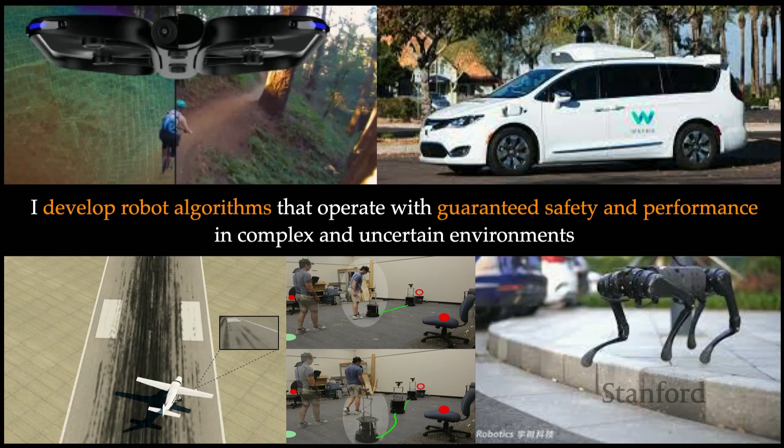If you look at these systems, machine learning and AI are becoming increasingly pervasive in their autonomy stacks, most notably for perception and trajectory forecasting, but also for planning and control. For good reasons: machine learning is really good at capturing the complexity of real-world situations that these systems must operate in, which could be otherwise very hard to capture using engineering domain knowledge.

But inclusion of machine learning has also come up with some new safety challenges for these systems. We are right in the Bay Area where we hear news such as Cruise cars being rolled back from San Francisco City, or robots crashing into humans on the factory floors. The issue is severe enough that the US government, and since then many other governments, have passed executive orders to prioritize discussion on AI safety, both for autonomy and AI more broadly.

So there is this tension that we have a lot in autonomy today, which is: how can we enable these systems to leverage the capabilities and excitement offered by modern machine learning methods while also maintaining safety? In my talk today, I want to think a little bit about the source of this tension and what can we do about it.

I think one of the main reasons for this tension is that if we look at machine learning systems today, most of them are designed without any specific regard to safety. And when safety issues emerge in the design system, post hoc solutions are often engineered to counter these risks. I'm going to refer to them as safety bandages throughout my talk.

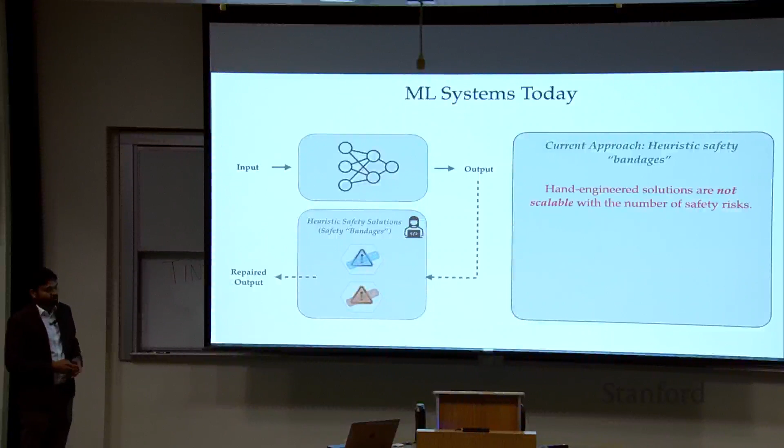First and foremost, these hand-engineered solutions are simply not scalable with the number of safety risks and the situations this system must encounter. Moreover, these post hoc solutions often tend to be conservative in nature, which might degrade the performance advantages that we get out of machine learning methods. And finally, the heuristics designed for certain kinds of deployment conditions might not work as the systems encounter new and new deployment conditions in the real world.

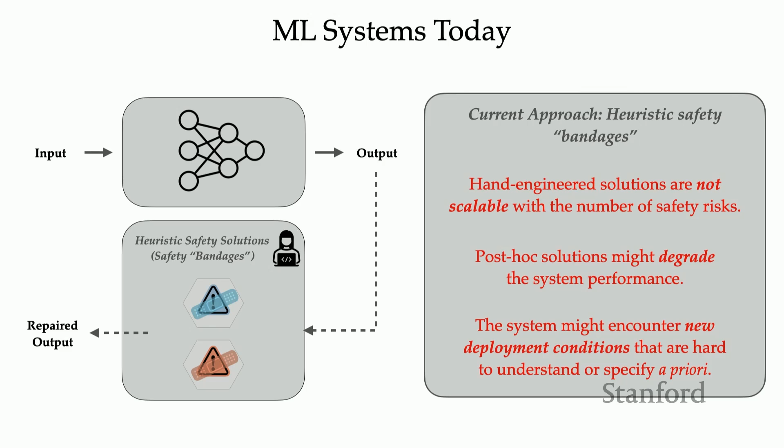So to overcome these challenges, in our research, we think of safety of learning-based systems as a continuous process, where safety is formally ingrained in different stages of the learning process, starting from the design and training phase, to their deployment, to iteratively improving the safety over the system's lifecycle.

So what that means is that we develop algorithms that programmatically incorporate safety requirements in the training process itself, in order to learn inherently safe and robust controllers and policies for robotic systems. Now that I would call design-time safety methods, or design for safety.

Now that's definitely a step forward, but that's not all, because as these systems will operate in new conditions, they will need to adapt their behavior. So we are developing methods that detect out-of-distribution and anomalous situations for these systems, and correspondingly adapt their behavior in order to maintain safety.

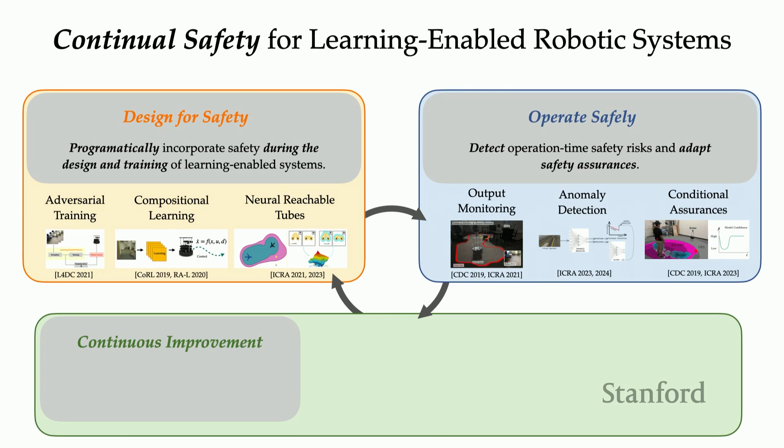And finally, we want these systems to learn from their past failures, past mistakes. We don't want the system to make the same mistakes again and again. So to close this loop, we are developing methods that allow robotic systems to improve their safety from their past failures. Together, I think of this as a closed loop — I call it a continual safety assurance framework, where assurances are provided provisionally during the design time, they are monitored and adapted during the operation time, and they're continuously improved over the system's lifecycle.

In the remaining time that I have, I want to dive a little bit deeper into some of my work. So we will start with talking about how can we learn provably safe controllers from data, how can we adapt these controllers online under new deployment conditions, and finally, I will talk about how can we stress test a given policy or controller to mine its safety critical failures.

So let's talk about learning safe controllers. But even before we talk about that, let's take a step back and ask ourselves, what do we even mean by safety? What do we want out of this safety analysis in an ideal world? I thought about it a lot, and I tried to summarize my thoughts in a single sentence, and this is my attempt at that.

I would say, out of safety analysis, we want to determine whether and how a robot can prevent its trajectory from entering into some undesirable set of states, which I will also refer to as the failure set. So what that means is that we want two key things. First, we want to quantify which configurations of the robot are doomed to fail versus which configurations are safe to be in, and how can we keep the robot in these safe configurations. So first is the problem of whether the system is safe, and the second is how can I keep the system safe. So I like to call it the whether and how of safety, and I will refer to that throughout my talk.

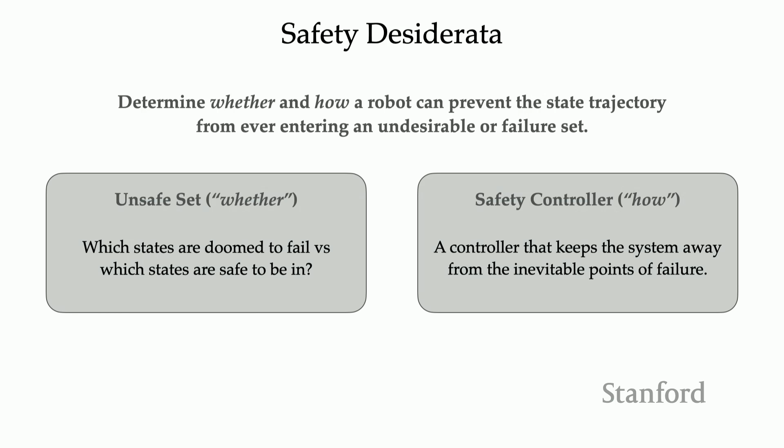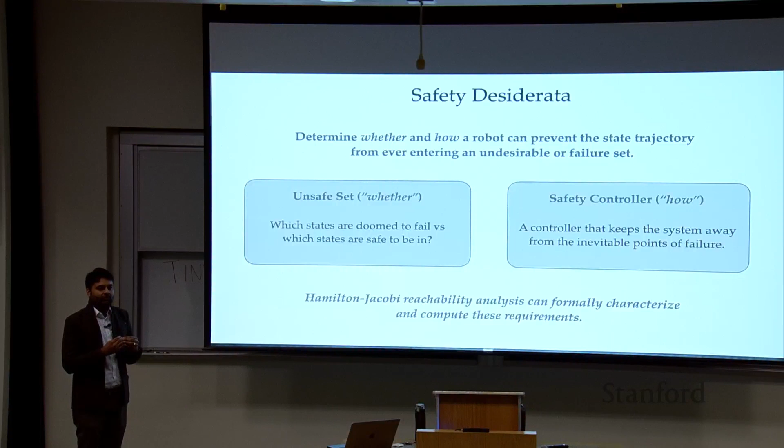Now, the good news is that control theory provides us a number of powerful frameworks for doing safety analysis of autonomous systems. In our work, we use one such framework quite frequently, called Hamilton-Jacobi reachability analysis. The reason for that is that not only does it help us mathematically characterize these two requirements, but also provide a mechanism to automatically compute them. So let me spend the next few minutes talking about what Hamilton-Jacobi reachability analysis is, and then I'm going to come back to the question of learning safe controllers from data using reachability analysis.

In reachability analysis, we assume that the underlying robotic system has some dynamics F with state X, control U, and disturbance D. So disturbance here represents uncertainty in the system, for example, modeling error or unmodeled effects, or an actual adversarial agent that we may want to safeguard against.

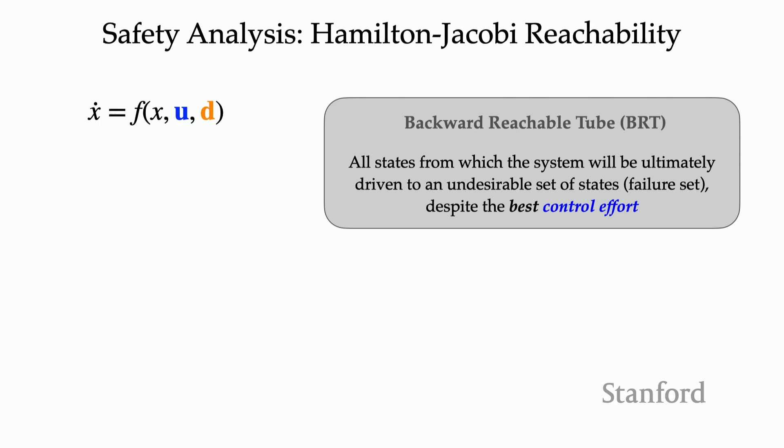Now, given these dynamics, the key thing that we are interested in is the backward reachable tube of the system, which is a set of all initial states from which the robot will be ultimately driven to an undesirable set of states, or a failure set, despite the best control effort. So essentially, the backward reachable tube represents the unsafe configurations for the robot and should be avoided.

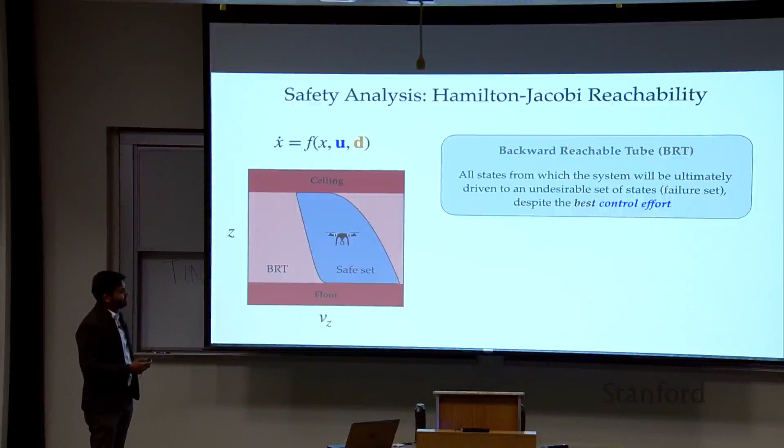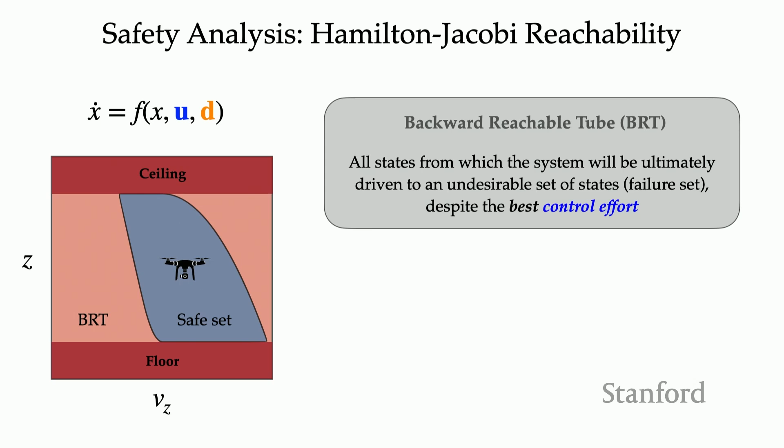Let's try to understand that with the help of a very simple example. Imagine a quad rotor moving longitudinally up and down in this room. Here the ceiling and the floor might represent the failure set that we don't want the quad rotor to crash into. The light red region over here is the backward reachable tube, meaning that if the quad rotor starts inside this set, then no matter what it does, it will eventually crash into the ceiling or the floor. So there is nothing you can do to avoid the collision.

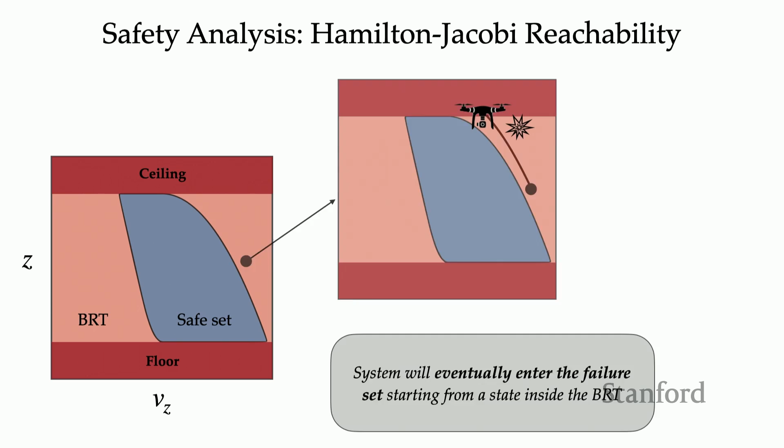In other words, these states are as doomed as being in the ceiling or the floor. The contrast of this light red region is the blue region, or the safe set for the system, meaning that if the quad rotor starts inside this set, then it has a controller or a policy to keep it inside this set at all times. So reachability analysis will give us both this blue set as well as this safety controller.

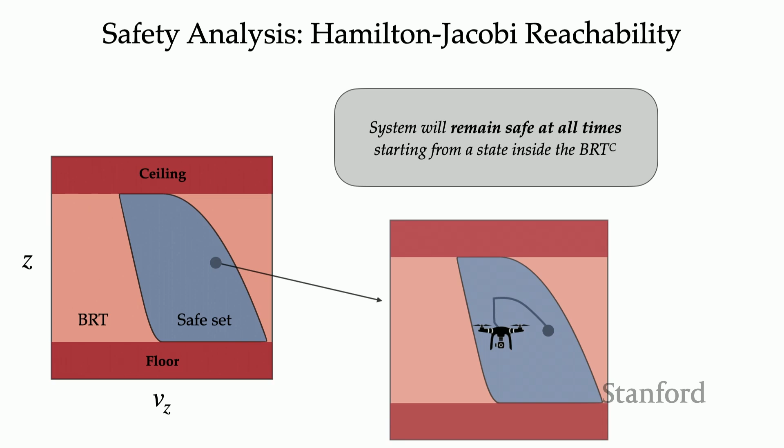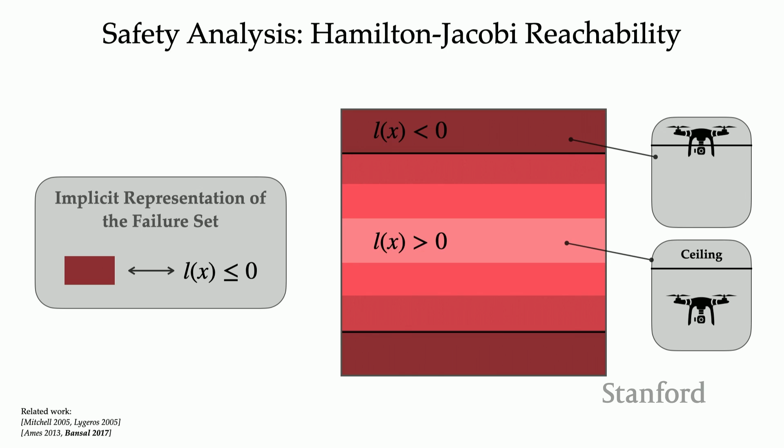So I'm going to dive a little bit into the math of reachability analysis and how it computes these two entities. The first step to do so is to define our failure set implicitly with a function L of x, which is negative inside the failure set and positive outside. So you can think of L of x as the safety reward the robot gets at state x. If you're inside the failure set, you get a negative reward, and if you're outside, you get a positive reward. We can use any reward function that satisfies this property, but the one that's quite popular in robotics is the signed distance function to the failure set, which is naturally negative inside the set and positive outside.

Given this reward function, the cumulative reward of the trajectory is given by the minimum safety reward along the trajectory. This is slightly different from normal optimal control and reinforcement learning problems where it's a sum of rewards. Instead, it's the minimum of reward. What that means is that if the robot trajectory ever entered the failure set, this cumulative reward will be negative, otherwise it will be positive. So just looking at the sign of this reward, I can tell whether the system trajectory was ever unsafe or not.

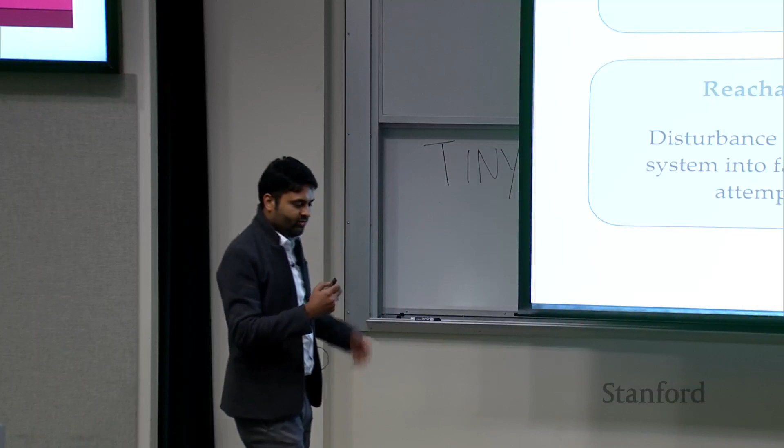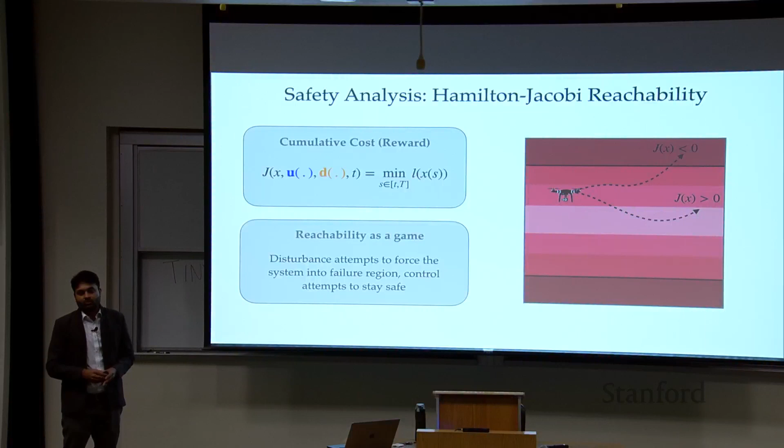And then, of course, we have control at our disposal. So what we want to do is formulate this game between the control and disturbance, where the disturbance attempts to force the system inside the failure set. In other words, it tries to minimize our safety reward, whereas the control tries to stay out of the failure set, maximizing the safety reward.

Similar to any other optimal control or reinforcement learning problem, we have a value corresponding to this game, which is simply the control maximizing and the disturbance minimizing this overall cumulative reward. Intuitively, this value function captures the closest the system will ever get to the failure set. If the value function is negative, the system must have entered the failure set at some point. If positive, the system remained outside the failure set at all times. So the backward reachable tube, or the unsafe set, is nothing but the set of states where the value function is less than or equal to 0.

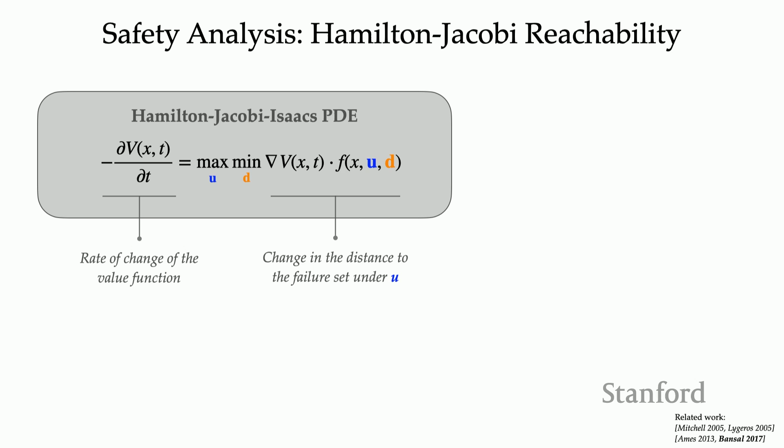That's the idea of reachability analysis. Now, this value function can be computed using the principle of dynamic programming, which results in a Bellman iteration or Bellman backup. But in continuous state and time, this results in a partial differential equation. So this is just the Bellman equation written in continuous state and time, honestly. But just like the Bellman equation, essentially it relates how taking a particular action affects the system value, or how the system's distance to the failure set changes. Once we solve this partial differential equation, which is called the Hamilton-Jacobi-Isaacs partial differential equation...

...we get the value function. Here I'm showing that value function for the quadrotor example I was showing earlier. More red means the value function is more negative, and more blue means it's more positive. So these states, which are closer to the ceiling and floor, are particularly bad, whereas states toward the middle of the room are very safe, as we'd expect, since we're equidistant from the ceiling and floor.

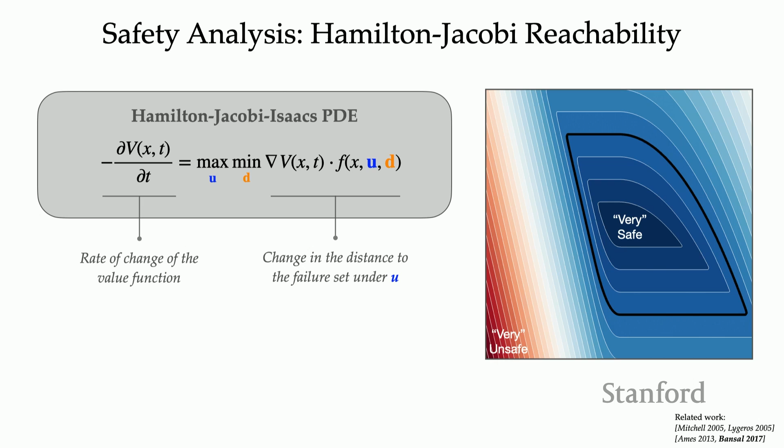Now, quick question: the value function is more negative toward the lower end than toward the upper end, even though the failure set is both ceiling and floor. Could you guess why?

Gravity. Because gravity is pushing us more in one direction. So when we are closer to the floor, we are more unsafe than when we are closer to the ceiling, which is what this value function is capturing in this color bar. But the beauty of reachability analysis is that, while this is an intuitive example, that's not all it's meant for—it automatically captures the effect of the system's dynamics on its overall safety.

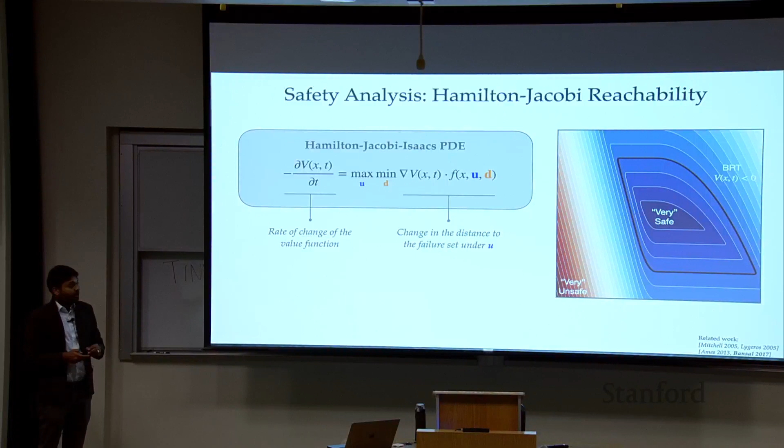Now, along with this value function, it also provides us a safety controller. Intuitively, what it does is that at any state x, it pushes the system toward higher and higher values—remember, positive values mean more safe. So it's essentially pushing us in the gradient ascent direction of the value function. That's what it's doing, okay?

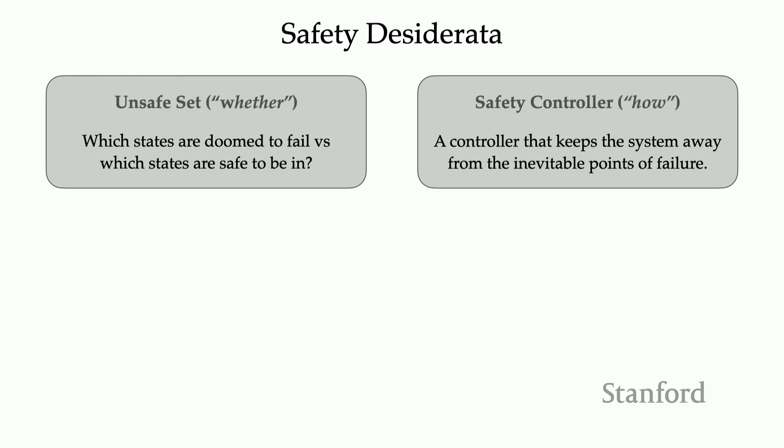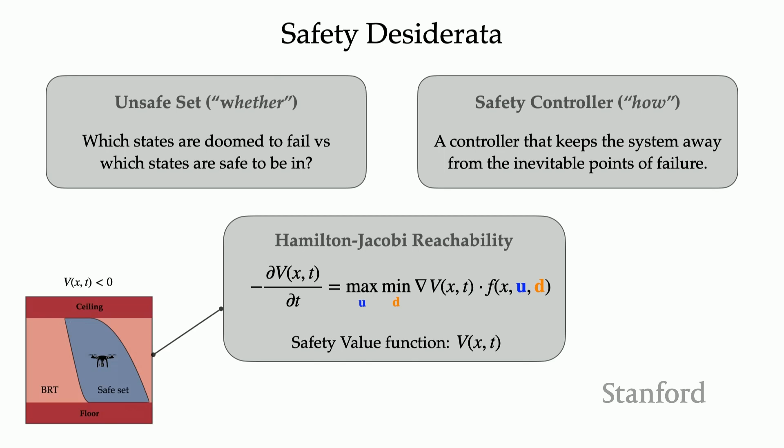So taking a step back, if you recall, I said there are two key things we want out of safety analysis: a set of safe states and a controller to keep me inside the safe states. I was talking about Hamilton-Jacobi reachability analysis, which captures these requirements with the help of the safety value function V, whose sign tells me whether I'm safe or unsafe, and whose gradient tells me a safe controller for the system.

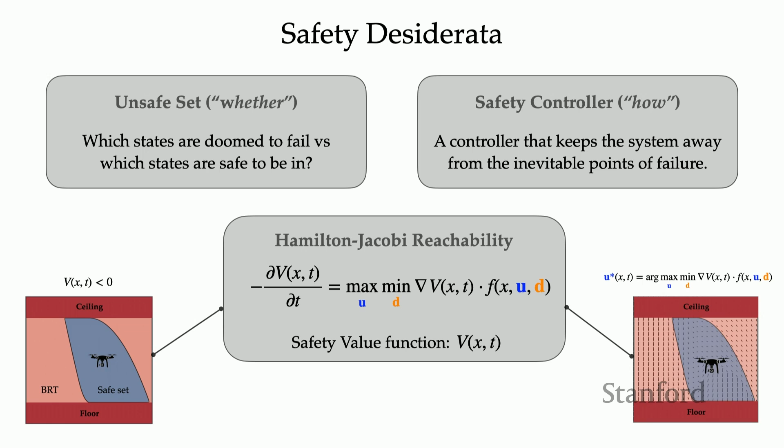Once again, the nice thing about this theory is that it can be applied to general nonlinear autonomous systems. But there are also a few challenges. The biggest one is scalability. Even though the theory is quite general, computationally it is very hard to scale these methods beyond even 5-dimensional systems, which really limits their use case in modern robotic systems. The second, equally bothersome challenge is that it's not immediately clear how to interface these methods with real-world data and machine learning models.

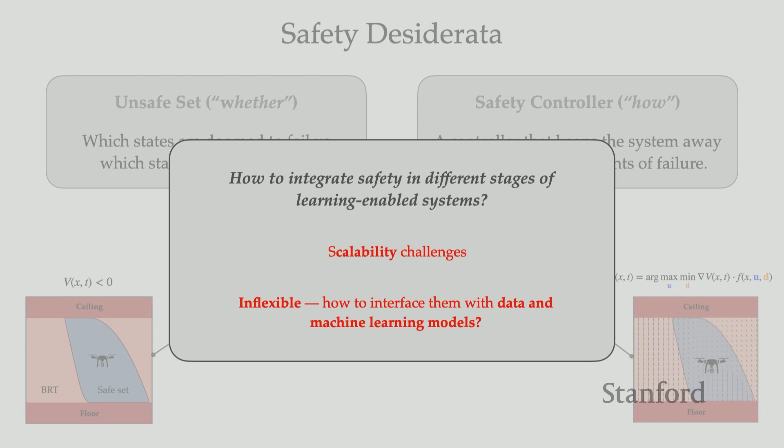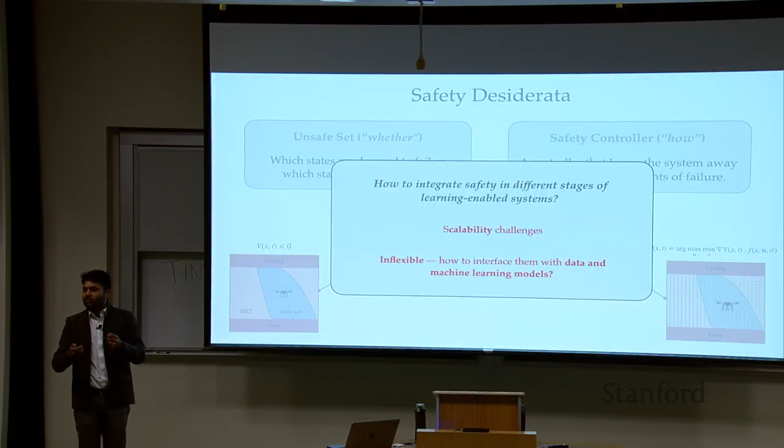So to begin making progress on these challenges, we will lean into neural approximations of the safety value function. Now, of course, we are talking about safety-critical systems, so we have to be a little careful when using neural networks, and I share that concern as well, and we will talk about it. But for now, I want to put guarantees on hold for a minute and talk about how we can structure the learning problem in order to learn good representations of safety value functions, and then I will come back and talk about assurances under these representations.

More specifically, we will learn a neural approximation of the safety value function, which takes as input the state and time of the system and outputs the corresponding safety value function. Once trained, this value function can be used to synthesize the unsafe set as well as the safety controller using the same mechanism that I just described. But how do we obtain this value function?

So we call this method DeepReach. DeepReach is a self-supervised learning method, which relies on the fact that the true safety value function must satisfy the partial differential equation that I showed earlier. So the PDE error can be used as a signal to train the safety value function. In each training iteration, we randomly sample some state and time, propagate it through the neural network to compute the value function, and correspondingly compute the PDE violation error. We backprop from that to optimize the neural network parameters. So over time, the neural network is incentivized to learn a more and more accurate representation of the safety value function that is consistent with this partial differential equation. It's very much inspired by physics-informed machine learning these days.

There are two key advantages of doing this. Number one, we can explicitly bake in safety requirements in the training process itself and learn inherently safe controllers from data. Second, the neural representations are much more easily scalable to higher dimensional systems, so we can synthesize safe controllers for a broader class of autonomous systems.

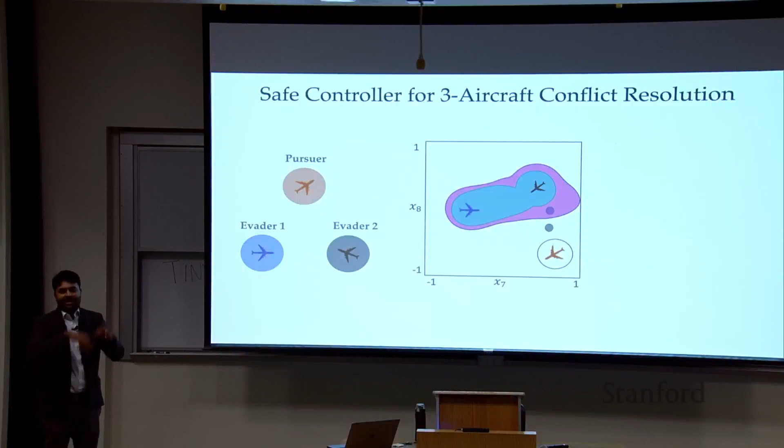Given the high dimensionality of this problem, a direct BRT or unsafe set computation is not scalable in this case. So what is often done in multi-agent literature is to compute pairwise collision sets between these aircraft and take their union as an approximation of the unsafe set. I'm going to show you a slice of that 9-dimensional set in 2D, shown in green. This means that if I start at any configuration inside this set, at least 2 of the 3 aircraft will come into close proximity of each other, in other words, they will collide.

But with DeepReach, we can directly compute the high-dimensional BRT, and a slice of that is shown in pink. It captures the green region, but has some additional configurations that we could not capture earlier because of computational limitations.

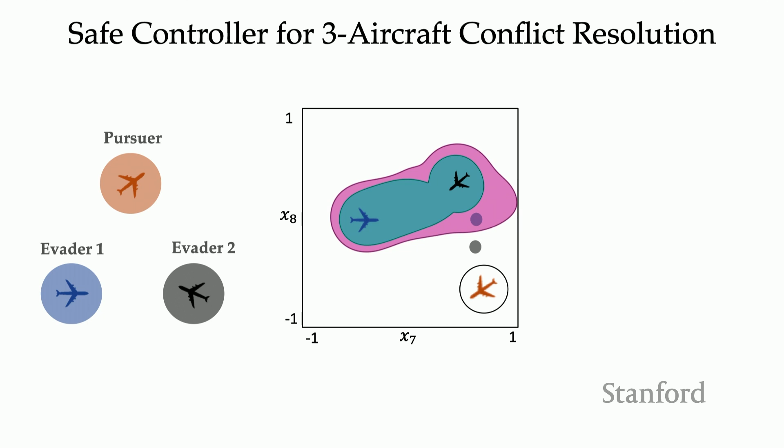Let me show you one such configuration and see what's going on here. Starting from this configuration, I'm plotting the trajectories of the 3 aircraft. Here you see the orange vehicle going after the blue vehicle, and the blue vehicle is able to avoid the orange vehicle, but in the process it cannot avoid a collision with the black aircraft above. So there are these 3-way interactions happening between the aircraft, which we could not capture earlier because of computational limitations. But now we can not only capture them, but safeguard against them using DeepReach-based safety controllers.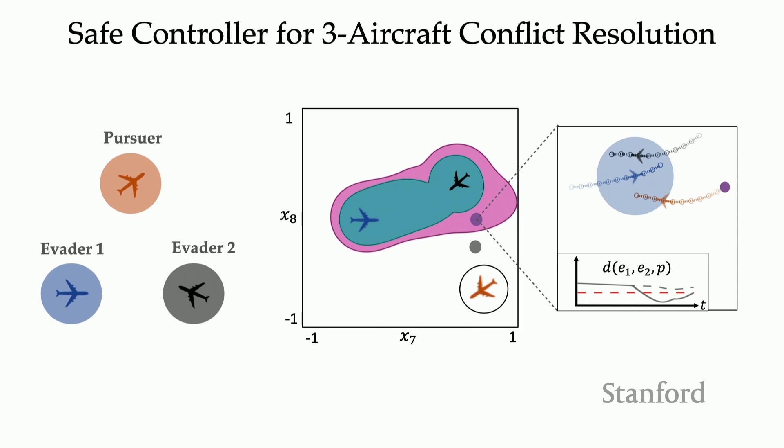We have also applied this framework in the context of autonomous driving. This was inspired by my work at Waymo, which at the time was dealing with urban driving, before San Francisco rolled out. One of the big problems was stranded vehicles you encounter in urban driving, like an Uber or a trash truck waiting in your lane, blocking it. In this case, the autonomous car needs to go to the other lane, cross over, and come back to its own lane without colliding with oncoming traffic.

We started with a learning-based controller, and it performs really well, except that it was not always able to capture this nuanced intersection point between the two cars, which leads to collision like over here. But with DeepReach, we can now additionally bake in the safety requirements directly into the learning process.

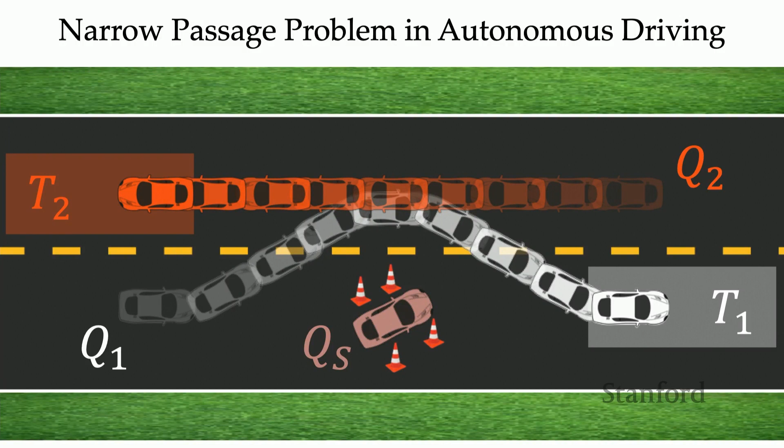Let me show the behavior of that controller in the car icons over here. What it does is that it actually pushes the white car a little bit towards the stranded vehicle and makes the orange vehicle swerve so that clearance is formed between the two vehicles. Once they cross each other, they go back to their respective lanes.

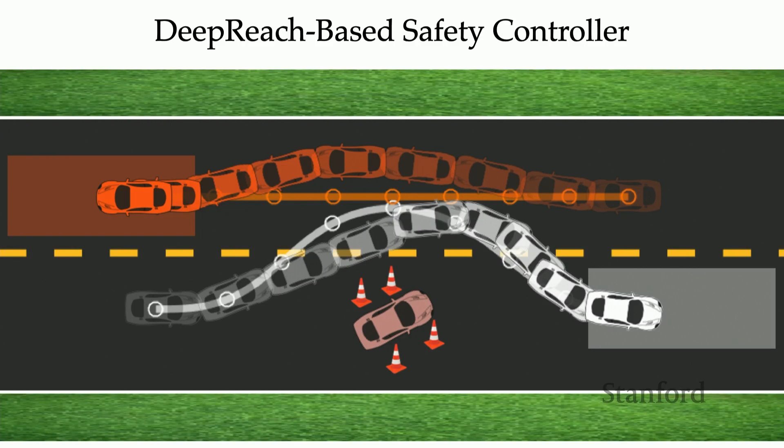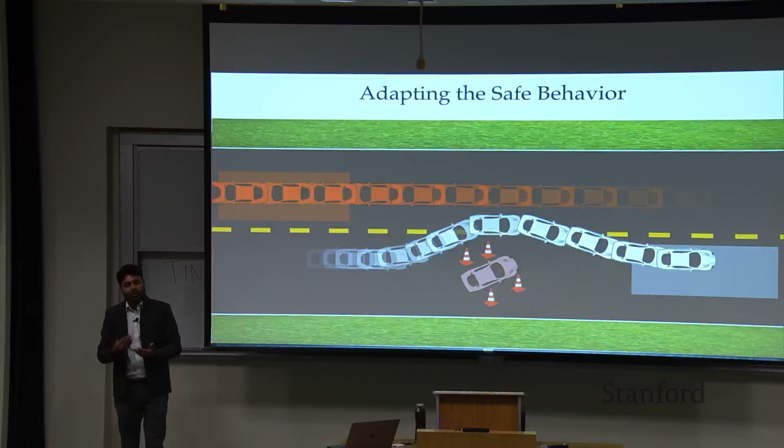But what is particularly interesting is that the behavior of the safety controller automatically adjusts to the oncoming traffic. For example, if the orange driver is very aggressive, the safety controller makes the white vehicle wait behind the stranded vehicle, let the orange vehicle pass, and then go over and cross the lane. If you think about it, this is how intuitively we would drive in these situations, except now these behaviors emerge automatically out of the learning-based system because the safety requirements were baked into it.

In our latest work, we applied DeepReach for learning safe controllers for legged locomotion. Here, the safety problem is a little bit more challenging because it's a hybrid system. It has both continuous controls, but also discrete controls coming from different walking patterns. The safety controller reasons about different walking patterns in order to reach its goal without colliding with obstacles.

What I find exciting is that my student Shuang here is deliberately trying to push the robot into a collision, but the safety controller counteracts this external disturbance, sometimes even changing its walking pattern completely in order to maintain safety.

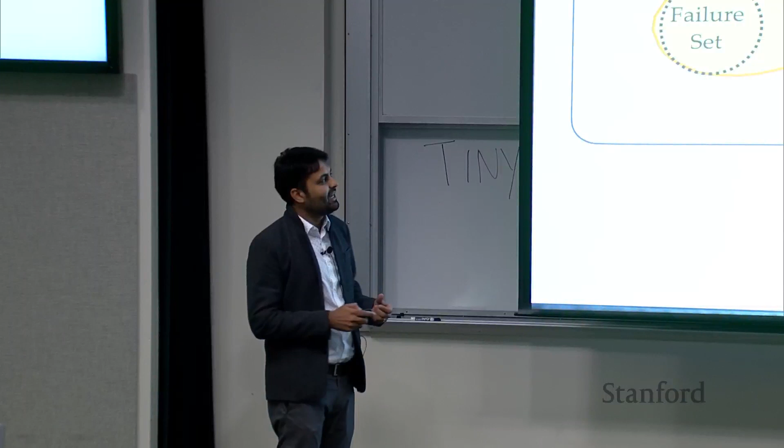When I was starting to discuss DeepReach, I said let's put guarantees on hold for a minute. So let's go back to that, and talk about how we can provide safety under these learned representations. As such, a neural network can make errors, and the safe set provided by DeepReach is only a candidate safe set. Pictorially, there could be states inside this candidate safe set which eventually might steer the system inside the failure set.

To counter this problem, we have been looking into probabilistic safety assurances for DeepReach. I'll talk about what that means in a second. The key idea behind this whole probabilistic assurance is that the learned safety value function induces a candidate safe policy for the robot as well, which if I apply on the system should ideally achieve the same value as what DeepReach was trying to learn, because that's what it means to have the value of a policy — if you roll out that policy, you should achieve the same value back.

So the gap between the two value functions can actually be used to calibrate the learning error. In other words, I'm interested in finding a bound on the maximum learning error, the gap between the predicted one and the one I get by rolling out. And if I can compute this bound, then I can simply correct my value function by this bound. Pictorially speaking, if I look at any states in the super delta level set of my value function, then that state would remain safe under the induced policy by DeepReach.

So then the last thing that we need to do to provide assurances is to compute this bound delta.

We have looked into a number of different ways to compute this delta, including neural network verification methods and scenario optimization. But the one I'm particularly excited about, and going to talk about today, is conformal prediction. There are two reasons for that: first, it's sort of beautiful because of its simplicity, and second, it can easily handle inputs of very high dimensions, which is what we're primarily interested in for high dimensional control.

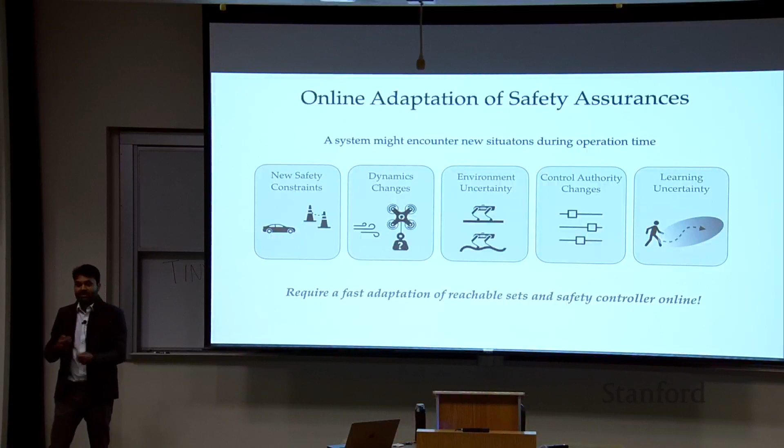But so far, my definition of what is safe or unsafe isn't changing, and everything about this system is known a priori, whether it's dynamics, control bounds, or whatnot. That's not true in the real world. In the real world, you will constantly encounter changes in your safety constraints, dynamics, control authority, or environment. As the system learns more about its world, it needs to dynamically adapt these safety controllers to maintain system safety. So that's what I'm going to talk about for the next 5-10 minutes: how can we adapt these safety controllers online very quickly?

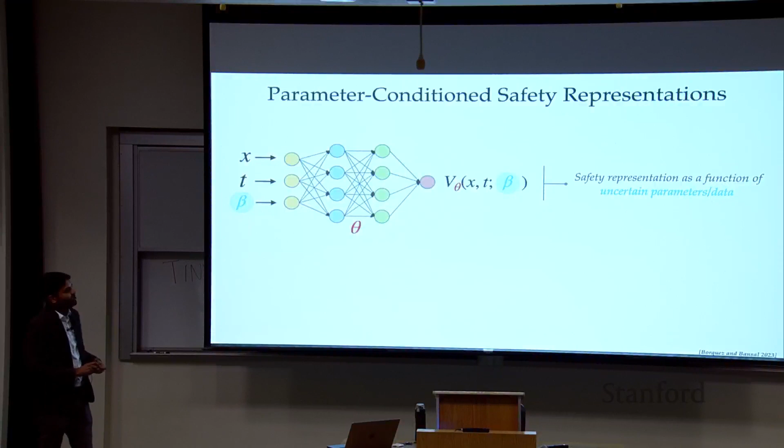One of the exciting aspects about neural safety representations is that you can easily input additional data to the neural network, for example uncertain system or environment parameters, and learn the safety value function as a function of these parameters. We call these parameter conditioned safety value functions, since they're also now conditioned on beta. The advantage is that if you learn this parameter conditioned value function offline, online you can quickly activate the safety value function corresponding to the deployment conditions you encounter in order to maintain safety.

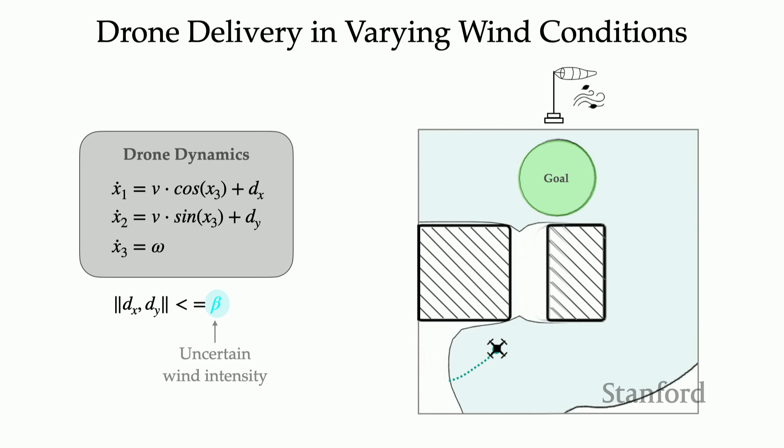But on its route, the wind conditions change, and now the wind intensity is high, so the safe set changes. Now this middle route is no longer safe for the system under this high wind intensity. But using this parameter conditioned representation, we can quickly adapt our safety controller, which in this case goes on to take a longer but safer route to its goal location.

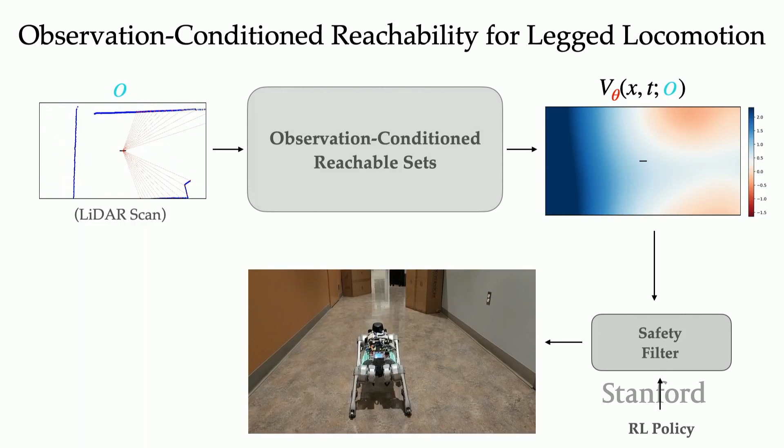In fact, we don't have to stop at just parametric changes. We can now think about adapting the safety value function directly from high-dimensional observations, such as RGB images or LiDAR scans. For instance, here this robot dog is dynamically constructing its safety value function directly from raw LiDAR scans, and using it as a safety layer on top of an RL-based policy to maintain safety in this unknown environment.

So not very innovatively, we call it observation conditioned reachable set instead of parameter conditioned reachable set. And there are two key adaptation components here.

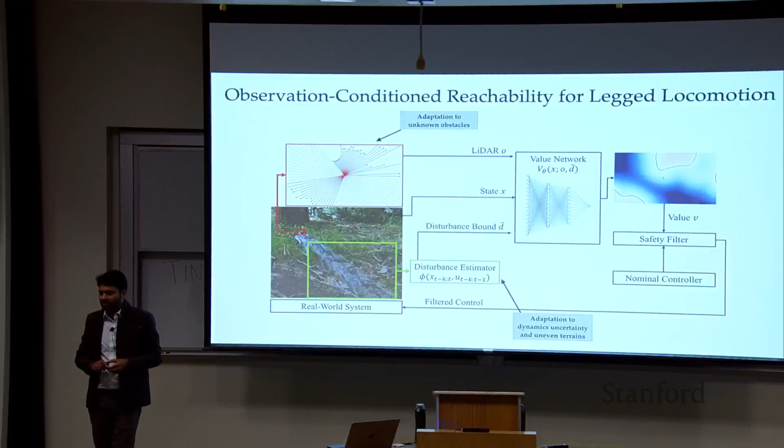The first one is that the robot uses this LiDAR scan to dynamically adapt its safety value function, which allows it to adapt to unknown obstacles that it's going to encounter in the real world.

There's a second adaptation component, which allows it to constantly estimate the uncertainty in its own dynamics, for example due to rugged terrains or slippery surfaces it might encounter, and correspondingly adapt the safety value function using the idea of parameter conditioned reachable set. So it's combining both together to ultimately get this safety value function, which is then used as a safety filter for a nominal policy.

Let me highlight the uncertainty estimation component a bit more. In this video, the robot encountered a slippery patch. As the robot enters this slippery patch, the uncertainty estimation in its dynamics is high. Correspondingly, if you look at the safety value function, it becomes more conservative—more red meaning more conservative—and it slows down the robot in order to avoid a collision with the obstacle in front.

Of course, there is also adaptation going on based on LiDAR, but I'm only highlighting the uncertainty component part here. So this is the kind of adaptation we can enable in real time on robotic systems.

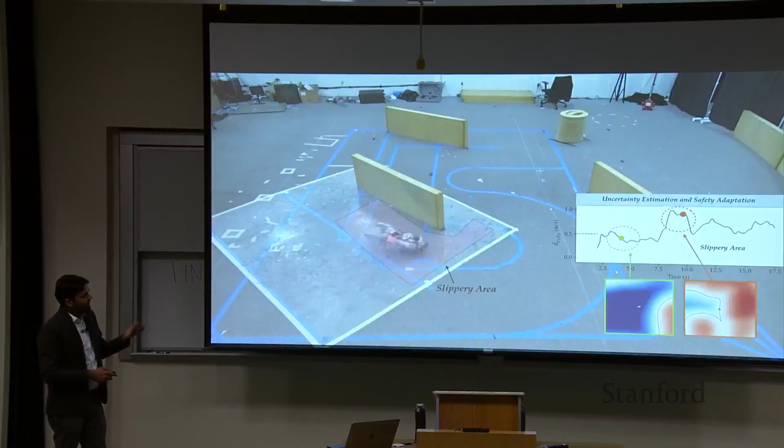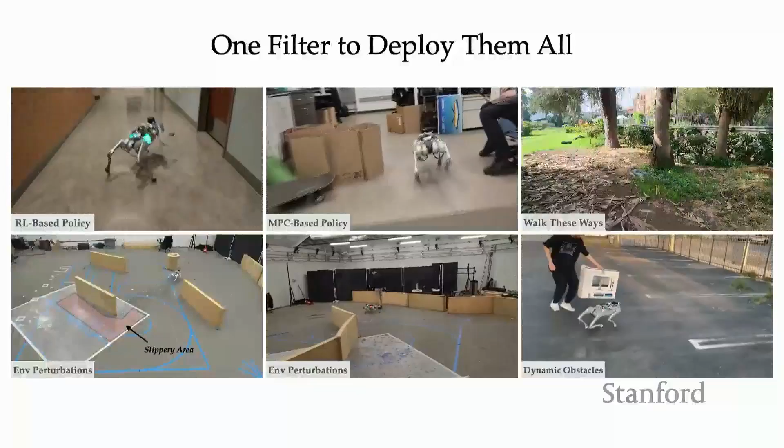In fact, this framework is completely agnostic to what underlying nominal policy you're using. So here I'm using it as a safety layer on top of several different RL-based policies, such as RMA, Walk These Ways, as well as MPC-based policy, in a variety of different environment terrains, dynamic obstacles, and adversarial humans.

Again, the key component here is to be able to adapt to dynamic obstacles or unknown obstacles and environment uncertainty, which is what the neural safety representations enable us to do.

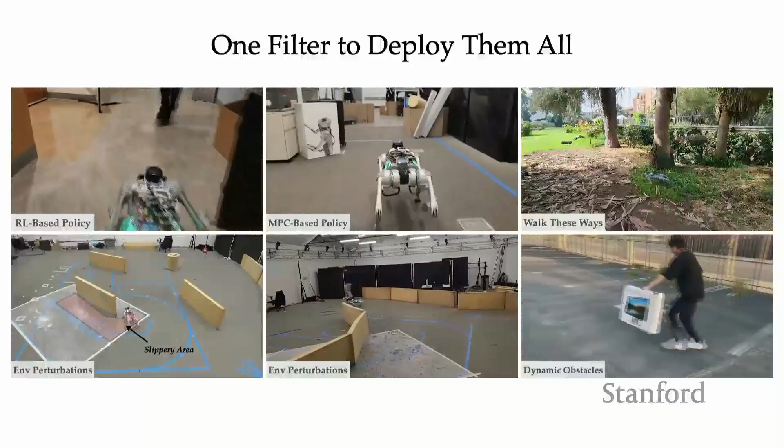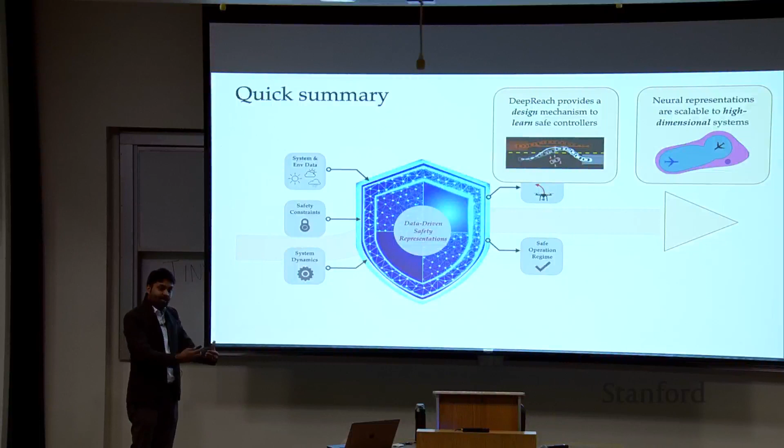Okay, so far I've talked about designing neural safety representations and adapting them online corresponding to the changes in the system and its environment.

Now, for the remaining time, I want to focus on the reverse direction, which is: suppose you give me a learning-based policy. So far I was designing the learning-based policy, but now suppose you give me, for example, an RL-based policy—how can we stress test this learning-based policy to figure out the regimes where it might cause safety-critical failures of the system?

We have been particularly interested in stress testing vision-based controllers for two reasons: because they are becoming increasingly ubiquitous in our autonomy stacks, but also because they have traditionally been very challenging to handle using traditional safety analysis methods, due to their high dimensionality and the complicated nature of visual inputs.

Let me formalize the problem a little bit. Once again, we have a robotic system with some dynamics. At each state, we have a visual sensor giving me visual observations, such as an RGB image or a point cloud, which is taken as input by a vision-based controller that gives me the control to be applied on the robot.

I'm also given a simulator, which I can use for stress testing this system. My ultimate goal is to figure out the set of images or point clouds, I, which lead to the failure of this overall closed-loop system. So I'm specifically interested in finding I's that lead to the failure of the system, not just the vision-based controller.

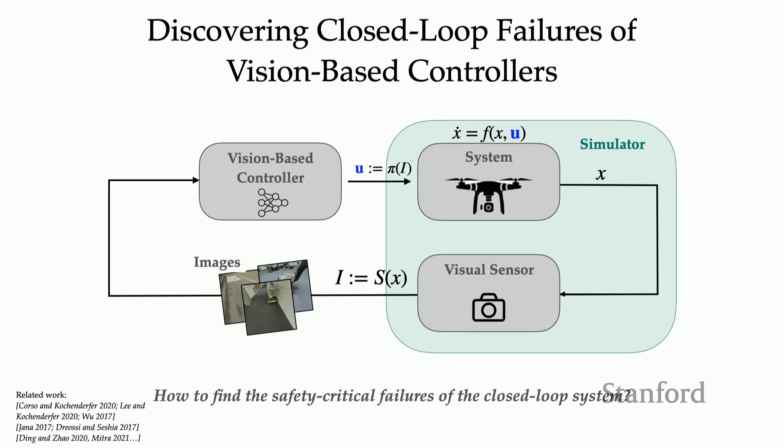What we do is cast this failure discovery problem as a reachability problem, and use the corresponding backward reachable tube to extract these visual failures. Let me explain how we can do that.

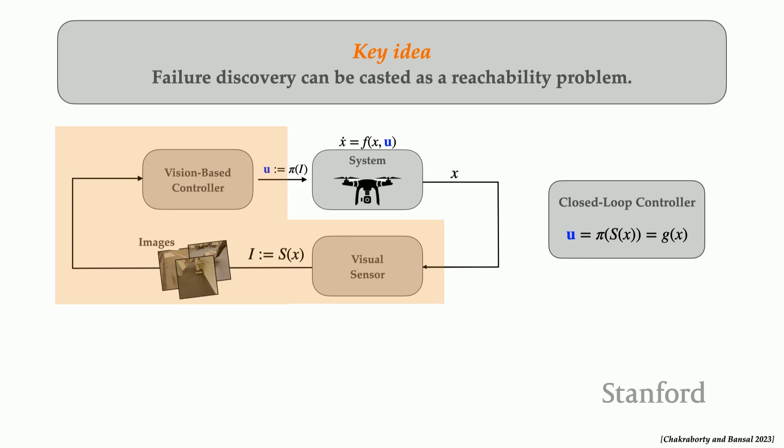We can cascade the robot's sensor function along with its vision-based controller to obtain an equivalent state-based policy for the robot. Right? Because X goes to I goes to control, so if I combine the two, it goes from X to U. So for the purpose of stress testing, I can simplify my closed loop as the system in closed loop with this augmented policy.

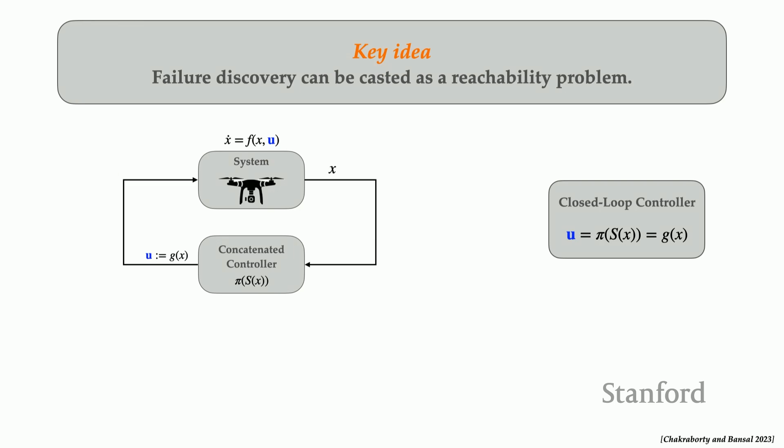And we know how to find failures of such systems—that's what I've been focusing on in the first half of my talk. We can compute the backward reachable tube, which generally gives me the set of all states that will lead to failure despite the best control action.

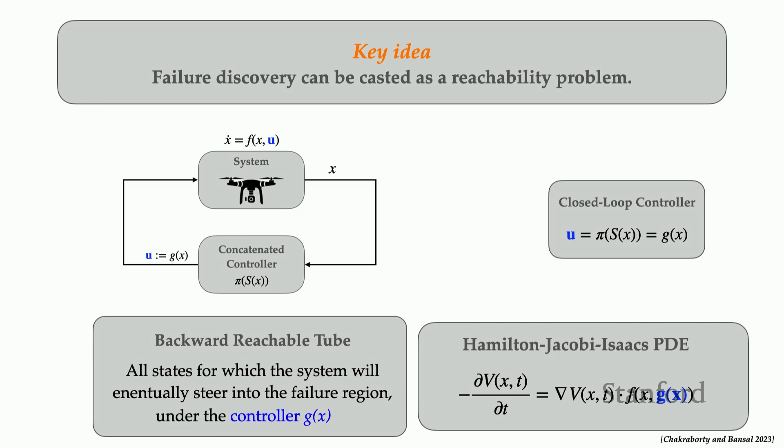But in this case, I'm not interested in the best control action—I'm interested in a specific controller that's given to me. So I can simply replace this max U by that specific controller. With this minor change, I can use the same reachability tools I've been describing so far to compute this backward reachable tube. You can think of this as policy conditioned reachability, if you will.

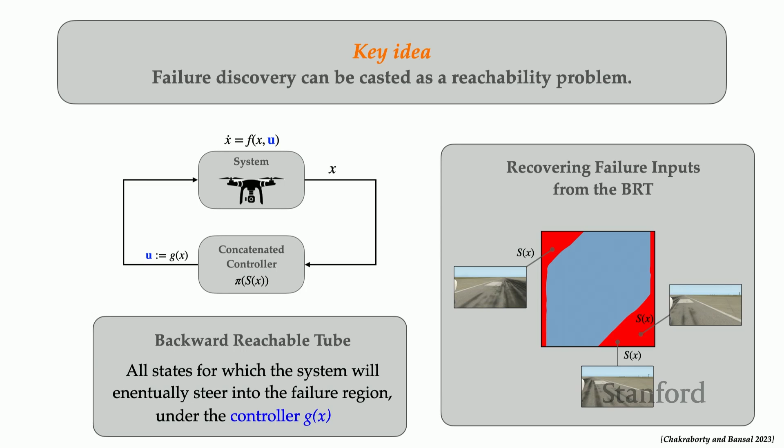So once I get the backward reachable tube, then I can look at the images seen by the robot along these failure states, which will give me the visual failures for the system.

Let me explain that in the context of an example. This work was done in collaboration with Boeing, which designed a vision-based controller for autonomous aircraft taxiing. The goal is to keep the aircraft on the runway using only monocular RGB images from the camera on the right wing.

They were testing what happens to the taxiing process if there is no GPS, trying out these vision-based policies. But in the process of doing so, we don't want the aircraft to leave the runway. So that's my failure set in this case, outside the runway boundary.

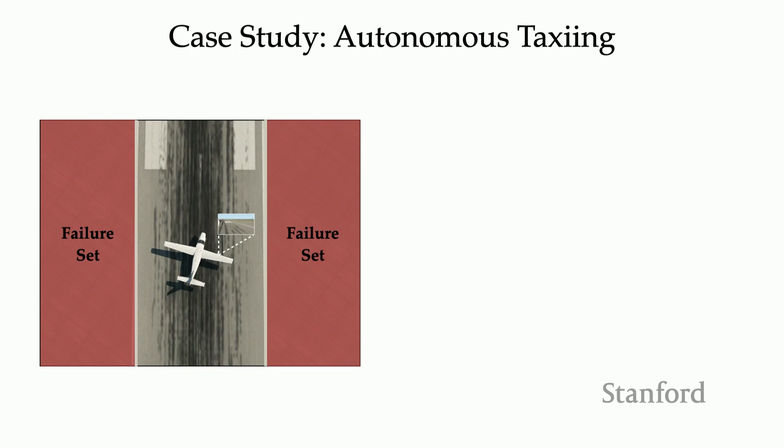Using this proposed framework, we compute the backward reachable tube of the aircraft under the vision-based controller. In red are the starting configurations of the aircraft from which it will ultimately be driven off the runway under the vision-based controller, whereas blue means the safe configurations. Here are some representative images that cause the failure.

Let's take a look at this image and see what's going on, why it's causing the failure. This is the first-person view, which is what the aircraft sees to make its decision. Upon analysis, we found that the vision-based controller confuses this runway marking with the center line of the runway.

And it drives the aircraft towards that marking. By the time it realizes it's not the center line, it's already too late, and it causes the aircraft to leave the runway. So using the proposed framework, we can find such semantic failures of the vision-based controller.

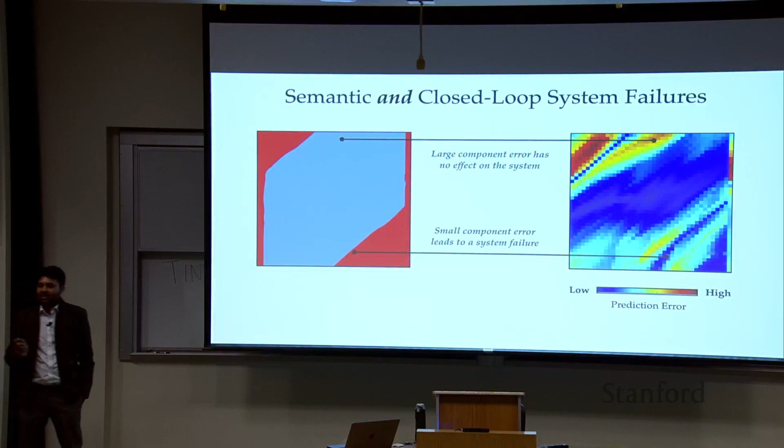I want to highlight that these are not just any semantic failures. These are precisely the failures of the vision component that lead to system-level failure.

For instance, here I'm showing you the prediction error of the vision-based controller. Red means high prediction error, and blue means low prediction error. You can see there's a whole bunch of states where the prediction error is high, but that doesn't mean anything for safety. The system is still going to remain safe.

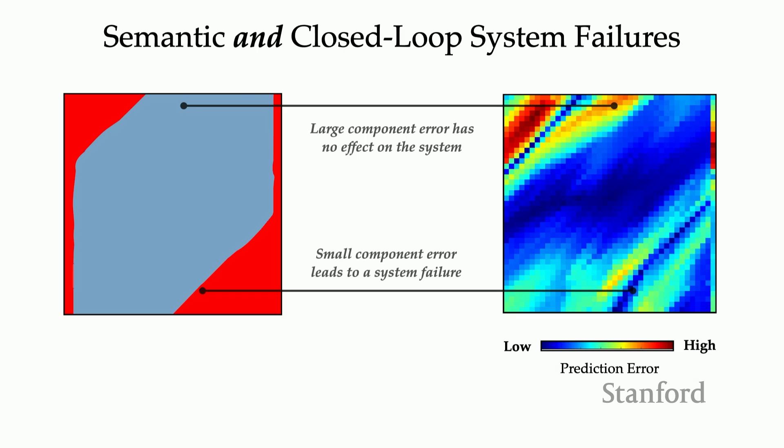So there's a component-level failure, but not a system-level failure. Conversely, there are states where the prediction error is really low, but that is enough to trigger a system-level failure. So we are particularly targeting those component-level errors that then lead to system-level failures.

And we can now combine this with the idea of parameter-conditioned reachable sets to obtain these failures as a function of different environment latents, such as the time of day or cloud conditions.

For example, the same state which was a failure during the morning time because of this runway marking is actually safe during nighttime, which is counterintuitive since most vision controllers degrade at night due to low visibility. But because of this semantic failure, this state is no longer a failure at night, and we actually improve the safety of the aircraft.

And similarly, we can find the failures as a function of cloud conditions, and we can get a diverse set of failures of this system.

Let me show another example. This is an autonomous indoor navigation pipeline, which has a perception component that takes as input the RGB image on the robot to output a waypoint, which is then tracked using an MPC-based controller.

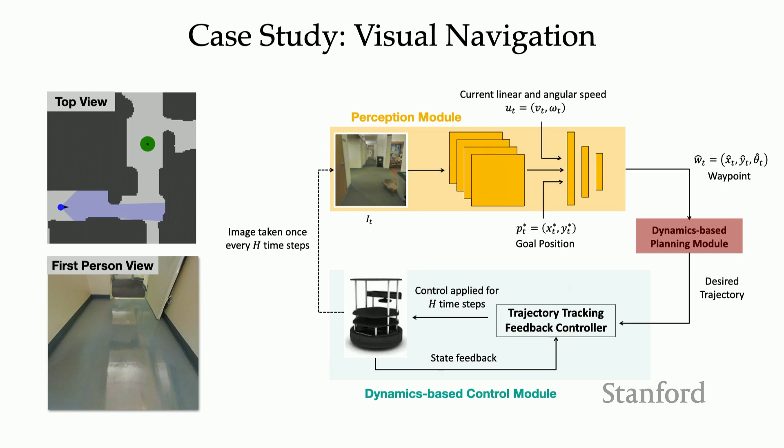This framework was trained entirely in simulation, and here is a run of that controller in the real world. It works quite well, even though the robot has never seen this environment before. Using only the first-person RGB image, it navigates through this cluttered hallway with bikes on one side and cubicles on the other side in order to reach its goal safely.

This is my bike, by the way. I used to sit here 5 years ago when I was at Berkeley.

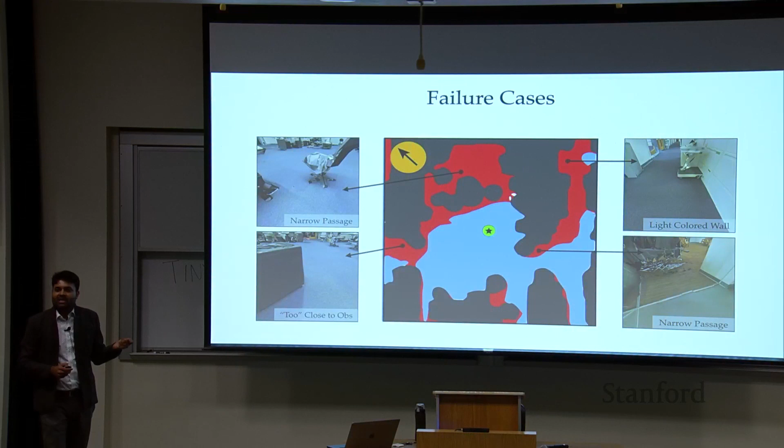But there are a lot of interesting failure modes of this controller that we found using the proposed framework. In the interest of time, let me highlight one of them. We learned that the vision-based controller learns a correlation between light-colored surfaces and traversability, because a lot of the training data for this controller has light-colored floors. So the controller somehow learned this spurious correlation that whenever there's a light-colored surface, it can go through it. During test time, when it encounters light-colored walls, it thinks it can go through it too, resulting in a collision.

So once again, we are trying to figure out those failures of the vision-based controller that ultimately lead to system-level failure.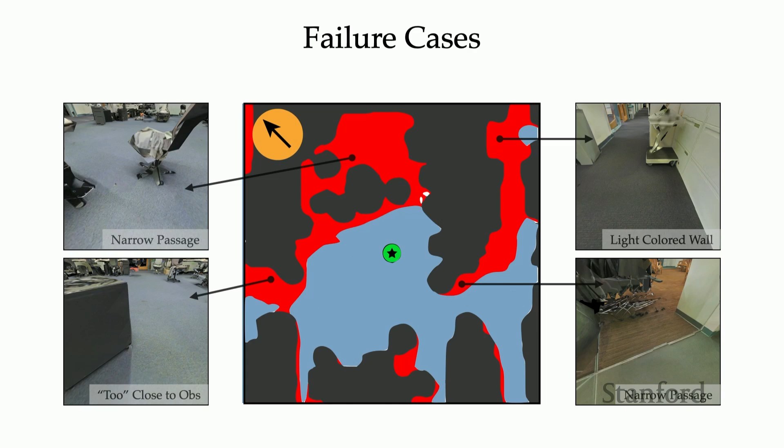But why am I doing this? Where am I going with this? Well, if I know the failures of a vision-based controller, I can use it to improve the controller. That's the ultimate purpose. For example, I can use these failures to train an anomaly detector, which given an image, tells me the probability of failure of the system. And if this anomaly detector triggers a fail, I can use a fallback controller to preserve safety in an online mode.

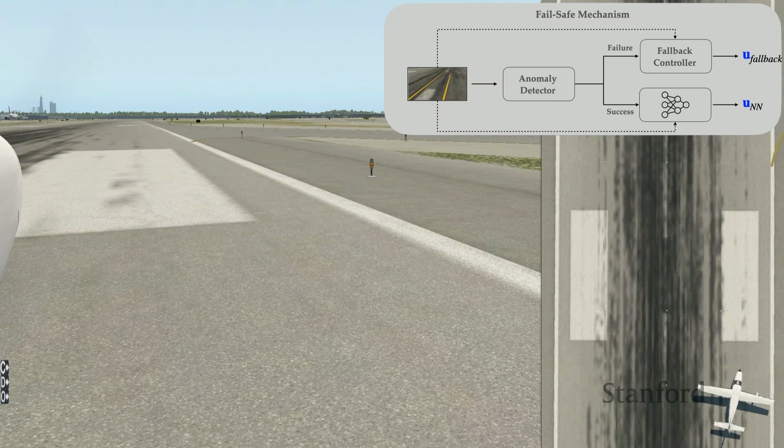So this is the same scenario as before, where the aircraft was failing because of this runway marking. But now you will see the anomaly detector flags that as a failure input, so it slows down the robot, which is what the fallback controller does. Then once we cross the pedestrian crossing, the runway marking, we go back to our learning-based controller and maintain system safety that way.

This is very preliminary work. Of course, there are a lot of interesting questions here, like how do you design the anomaly detector, and how do you design the fallback controller based on that anomaly detector. These are very interesting questions, but this is what a catalog of failures of the system can at least give us as a starting point.

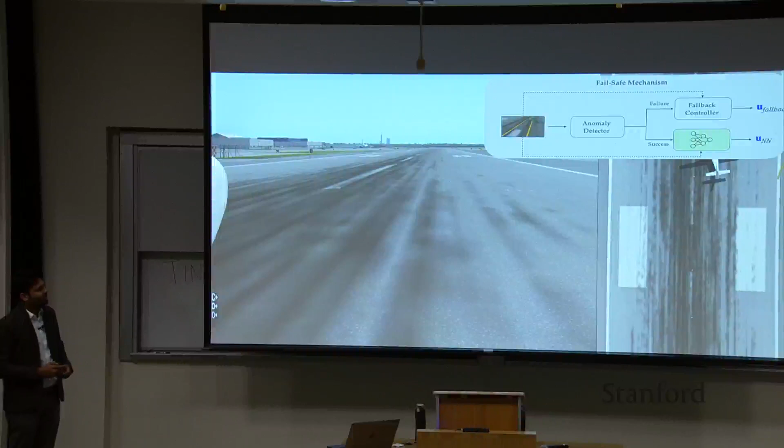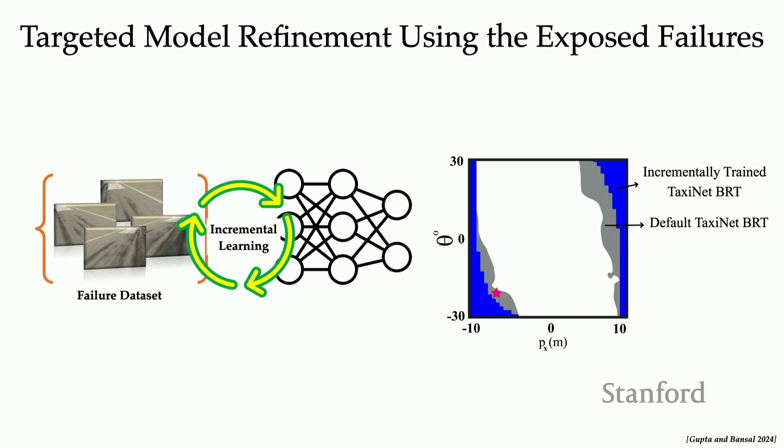Okay, let me take a step back. The key goal of our research was to design autonomous systems that can leverage the capabilities offered by modern machine learning methods while also maintaining safety. Towards that goal, we think about safety in different stages of the learning process, from design to approach to operation to offline testing. Today in particular, I touched upon part of our research, which is neural safety representations that can enable operationalizing such a framework.

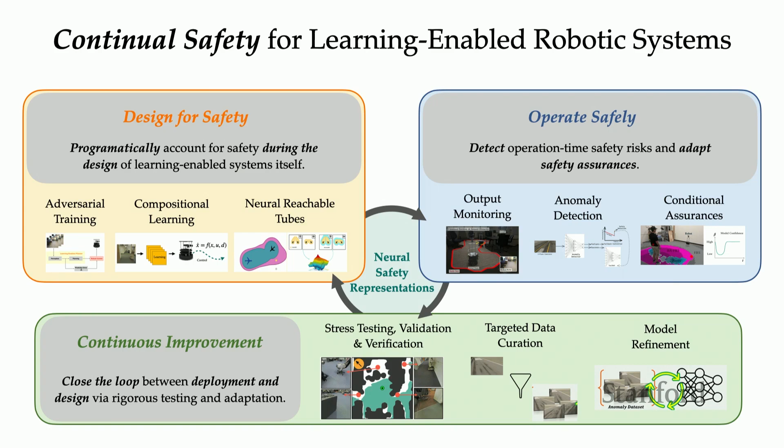I have a few more minutes, so let me quickly highlight some of the other projects in the lab without going into too much detail. I talked about DeepReach, which is one paradigm to learn controllers for robotic systems, but there are many other interesting learning paradigms that have shown very promising results.

For example, imitation learning. We've been asking ourselves, how can we learn safety-aware imitation learning policies, in particular behavior cloning policies? From a safety viewpoint, one of the problems with imitation learning is that it suffers from the compounding error problem, or covariate shift problem, which means that even if you give safe demonstrations to the system, there's no guarantee the resultant policy will be safe.

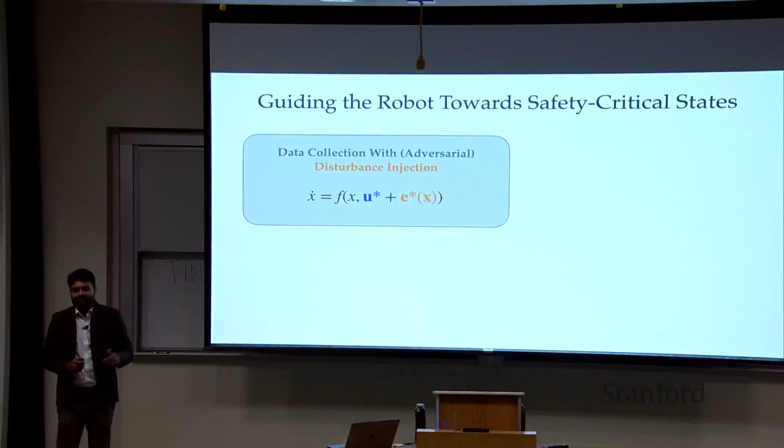To think about this problem, what we've been doing is injecting an adversarial disturbance into the system during the data collection procedure. This adversarial disturbance is also computed using reachability analysis, but it does exactly the opposite of what the safety controller does. Rather than pushing us away from safety-critical states, it pushes us towards them, doing gradient descent instead of gradient ascent on the value function. By doing so, our hypothesis is that the robot visits more safety-critical states, and we can learn corrective actions from those states.

So during training time, once we collect that data, we train the behavior cloning policy using the same methods as for the rest of our behavior cloning policies. But during test time, if the policy makes an error, particularly a safety-critical error, hopefully it will be able to better recover from such states. That's the hypothesis—let's see how it plays out.

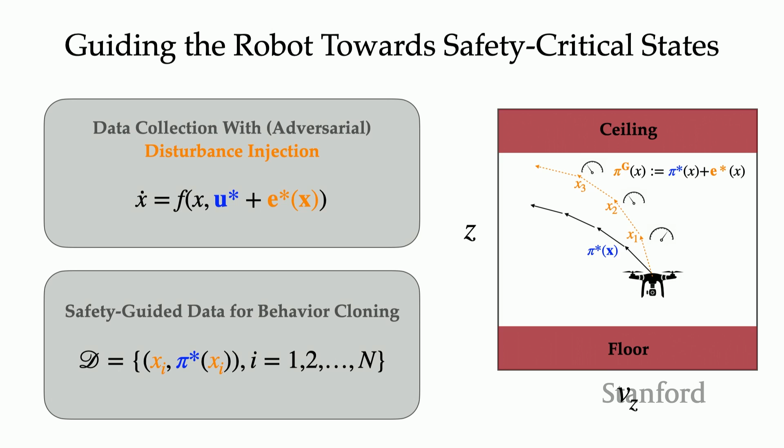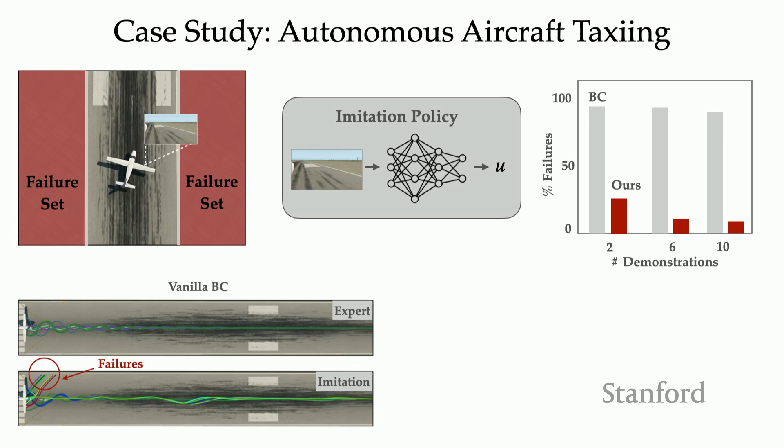To understand why, here I'm showing you the demonstration as well as the rollout of the policy for the vanilla method and then our method. You can see that for vanilla behavior cloning, as soon as the policy makes errors, in particular as it starts going towards the boundary of the runway, it cannot recover because it hasn't seen much data on those states. With the safety-guided imitation policy, we're pushing the system towards this runway boundary, so it can learn recovery behavior from such states, which reflects in its test time performance. To clarify, the data used for both methods is exactly the same.

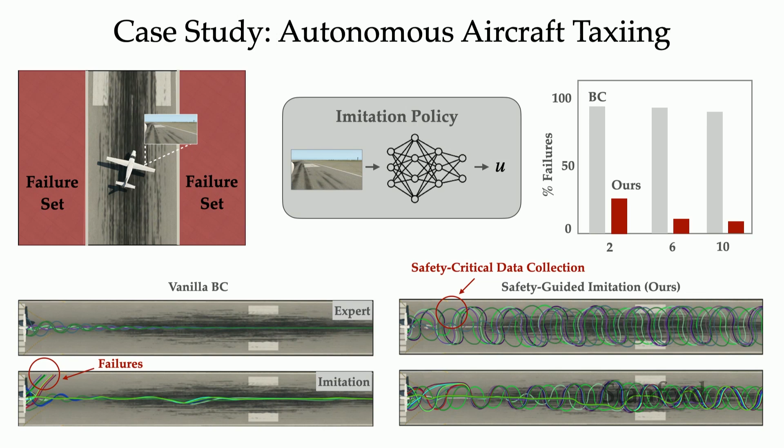We have also applied this on a real Crazyflie, and once again I think the story is the same. With only 5 demonstrations, we are able to do much better sim-to-real transfer, specifically when we think from a context of safety.

In fact, I believe there is something more here. This idea of using safety-critical information can be useful to guide the exploration of our learning agent more generally, in my opinion, in order to design more robust policies.

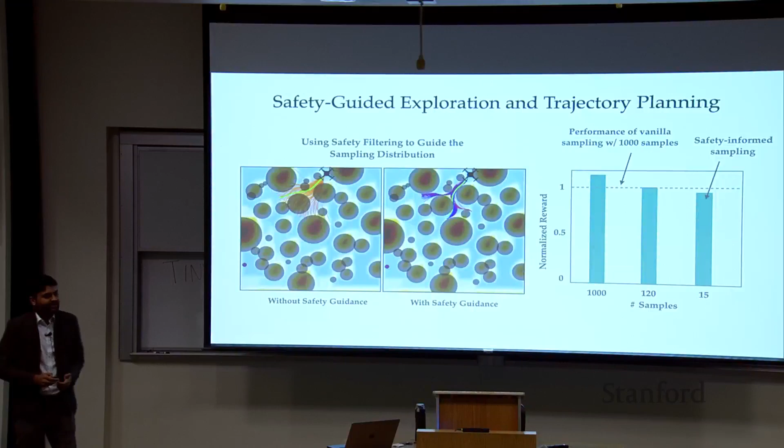For instance, here we are using the safety information to guide the exploration of a sampling-based planner, in this case MPPI. You can see how this signal helps the planner explore more relevant parts of the state space. Earlier, it was wasting a lot of samples in the obstacles, but those are useless samples that are never going to improve performance. If you guide them in the right direction, you can achieve the same performance with much fewer samples. So safety can also help with exploration during the design phase, a direction we are actively pursuing in our group.

Another big challenge in safety today is: who gives you these safety constraints? Who tells you what is safe, what is unsafe? That's a big question. Luckily, for many FAA applications, the FAA gives us the constraints, but in robotic systems that's not clear. So we've been thinking about how we can use language as a medium for somebody to flexibly define these constraints. For example, in this picture, as my robot is going through the lab, can I communicate to the robot to avoid the coffee spill on the floor?

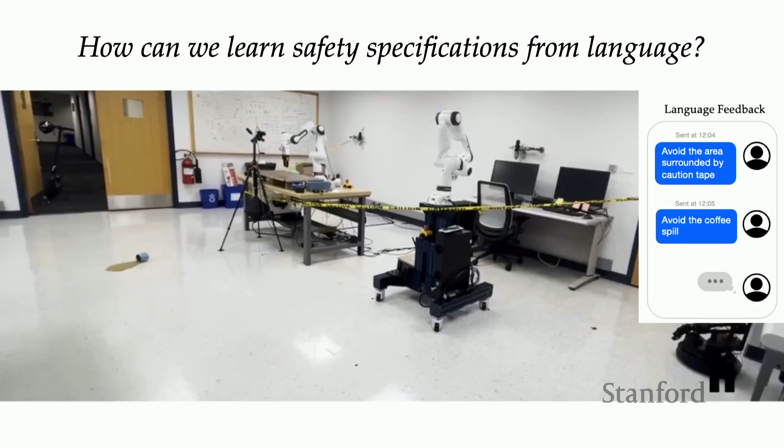We have been using a vision language model to convert this natural language feedback into physical constraints that are more interpretable by traditional safety analysis methods, such as reachability analysis or control barrier functions, in order to design a safety controller that adheres to this natural language feedback.

Here is a very simple experiment of that. You will see the safety constraints given by the user, and we're using a VLM to convert that into a safety constraint and then correspondingly compute a safety controller.

So now the robot is given this constraint, avoid the coffee spill — sorry, it actually doesn't stop here; somehow the video was laggy.

This is nothing fancy compared to what we can do with VLMs and LLMs today, but it's a starting point to think about how these tools can be used to define rich, semantic safety constraints for our robotic systems.